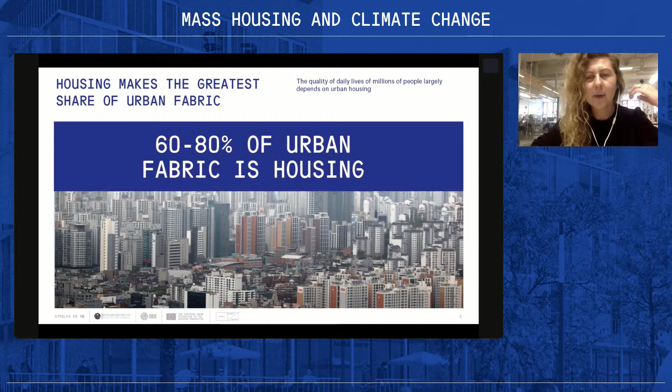Why addressing housing? Housing makes the greatest share of urban fabric all over the world, and it can take up to 80% of urban fabric. The quality of daily life, which is the most important thing why cities exist for, is highly dependent on the quality of housing.

And the great share of this housing in world cities at the moment is post-war mass housing. In Russia, we experience it to the greatest degree, I would say, because almost 74 million square meters of housing and 38 million apartments are built after the Second World War, and it's really mass-produced industrial housing. Almost 70% of the population in our country live in similar conditions, and this we can see around many other countries. For example, in France, there are almost 6 million apartments of the same typology.

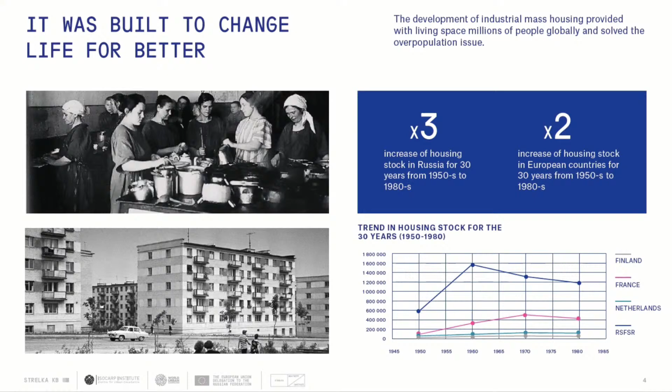In the beginning, it was built to change life for better, at least what we can see in the history of our families, I would say, in Russia. And only in 30 years in Russia, the housing stock tripled from the 50s to the 80s, and in many other countries it has doubled. So this is really the typology that shapes residential areas in many cities of the world.

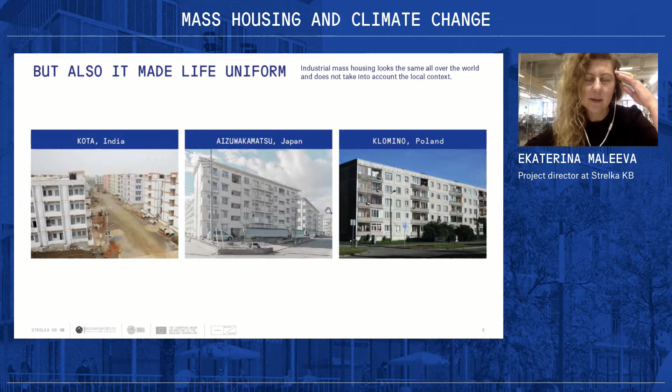But having solved this housing crisis, it also made life uniform, because you can see similar typologies all over the world. For example, from India to Japan and to Poland, you can find absolutely similar landscapes.

And we are thinking of how to reshape or adjust this kind of housing to modern conditions, or maybe diversify it to modern life. We understand that we cannot just replace it. This is totally impossible because the amount of this housing is too huge.

For example, it's going to take 30% of Russian annual GDP to just replace one-third of mass housing units. Or we are going to produce too much construction waste if we would like to demolish it and rebuild. For example, the program launched in Moscow to demolish 5-story high buildings and replace them with modern housing produces as much waste as all households in the country per year.

So it's almost the households of the country with a population of 140 million. And also, when we think of replacement of this kind of housing, we understand that we are going to produce too much CO2 emissions, because construction industry, together with production of concrete, is also very polluting.

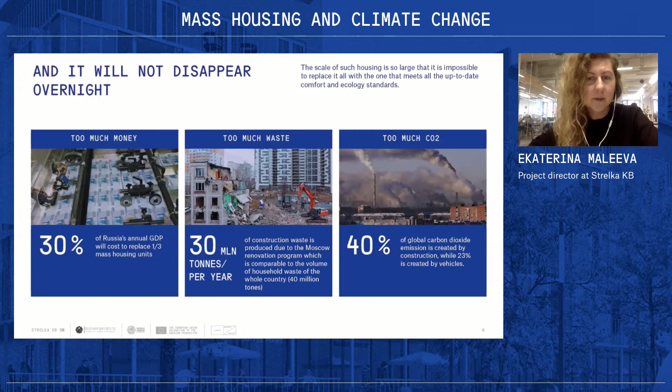We also understand that this housing can stay with us for longer than we expected, because in the beginning, when it was designed, it was planned for, let's say, a 100-year life cycle, and it hasn't expired yet. But if you renovate it, you can extend it for 40 years more. So it's not a case where we can imagine our cities becoming totally different in the next 100 years.

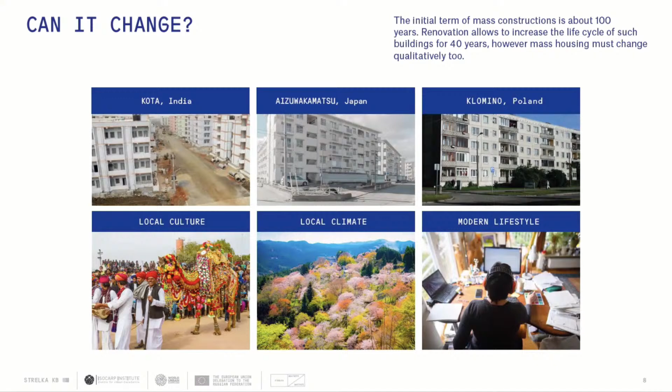So can this housing adapt and change to changing lifestyles and changing climate conditions? This was the question that we asked ourselves. Can it adjust to the local cultural context, to local climate context and future climate development, or adjust to modern trends in lifestyles?

That is why we have launched this workshop, which covers 4 different climate zones and considers different trends in climate change for those areas, and also considers similar typologies evolving according to the local context. We are happy that we have received applications and gathered participants from 10 countries, of course from Russia, but what is also interesting, from Argentina, USA, Iran, India, and Indonesia, which is a worldwide coverage.

And we are really happy to launch this event together with our partners. So I hope that this event is going to be a starting point to the broader discussion on the issue, which I think is quite important. Thank you.

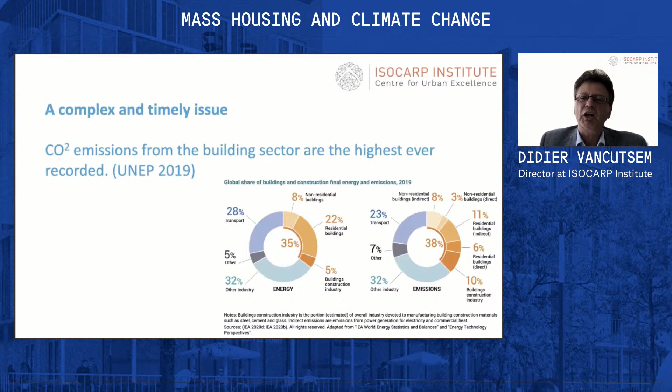Next slide. So it is crucial. And if you look at all these figures, it's really a complex issue. It's not only building, it's also a lot of different emissions produced by the building sector. If you look at the figures again here, this is the latest one from 2020, you can see that the building sector is responsible for 35% of energy consumption and also 38% of emissions and greenhouse gases, what Ekaterina was mentioning before.

And this is the situation now, but we know very well that it is growing and still continuing to grow, and we expect it to grow in the next 15, 20 years. If we see the next slide, we know that...

We are facing population growth, and we are facing a big challenge with the urban poor. With the urban poor, we have the big challenge of 880 million people living in slums to be accommodated in the next 15 years. And also with population growth, we are expecting 2.5 billion more people before or until 2050, which makes another 1 billion dwellings expected in the near future. So it's a really big challenge, and we need immediate action.

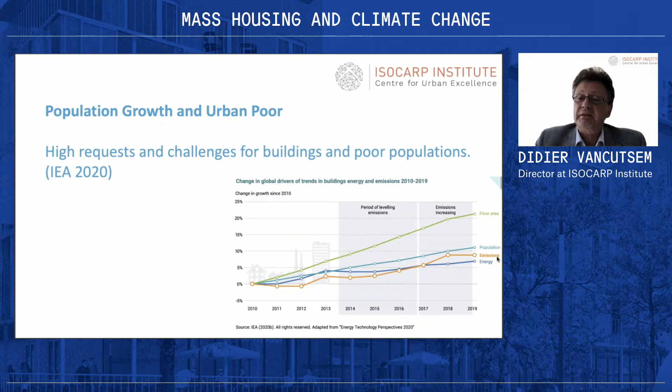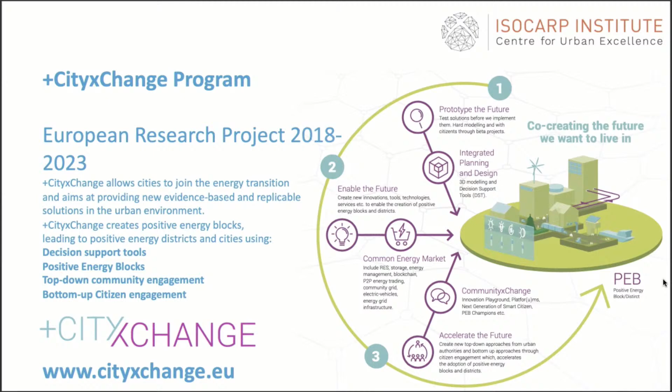And this is a kind of very interesting way of considering existing and future housing and how to make housing fit for the future, especially including all citizens. So this is an interesting initiative, but there are much more initiatives.

And of course, as the ISOCARP Institute, we are strongly supporting this initiative, because we are convinced that we need to raise global awareness on this issue. At the moment, it is not really discussed globally—it is discussed on national level, on the European level maybe, but not on the global one. This is why we would like to support and develop this integrated platform to share intelligence and knowledge, but also showcasing different initiatives and good examples and experiences.

So looking forward to the results and the discussion of today's Urban Thinker Campus. Thank you, Max. Thank you very much, Didier, for your words.

I would like now to introduce Christophe Lalande, the housing lead specialist at the Land, Housing and Shelter section of UN Habitat. We all know that UN Habitat focuses a lot on good urban planning, but the name itself, Habitat, involves a lot of talk about housing. So we are looking forward to hearing what UN Habitat has to say. Mr. Lalande, the floor is yours.

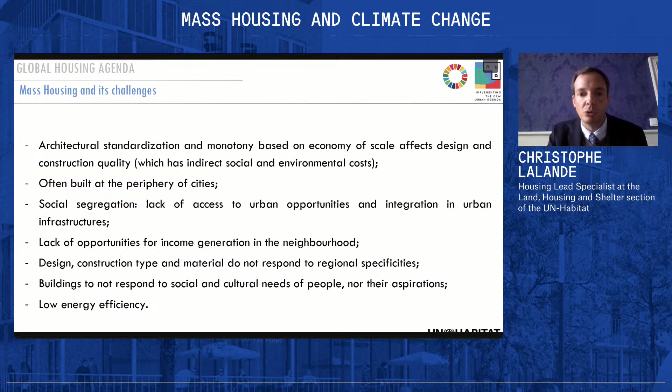We have some recommendations that we usually use when we intervene in countries on programs related to mass housing. First, when we talk about retrofitting or renovating the old housing stock, we are considering designing this into a long to short term strategy to deliver sustainable urbanization. This connects to the idea of not building housing, but building cities, using the needs and aspirations of the communities, of the people.

This is really important, especially when mass housing is used as a solution for slum upgrading. We see that in some countries. It's very important to encourage this participatory process. The new housing stock must also consider the needs of the community and the social fabric that already exists in these informal areas.

The need to connect with mobility and urban infrastructure is also really important. There is no adequate housing without access to connectivity services. We also want to promote local income opportunities, and to place public services and access to educational services as well. Next slide, please.

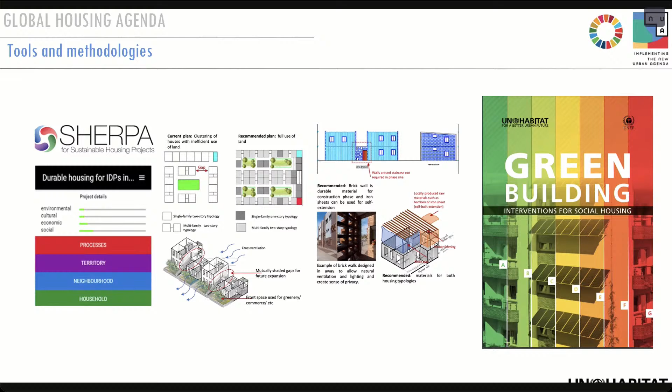We have a tool called Sherpa, which is becoming a certification tool for low-income housing. We have been piloting this assessment tool in some countries on real estate development or mass housing projects delivered by government. This is very interesting because it's allowing us and our partners to reflect about the future of the housing stock, its cultural dimension, but also the environmental sustainability of the housing stock in the future. We also have specific tools involving green building interventions that we have been using to increase energy efficiency in the old social housing stock in Eastern Europe.

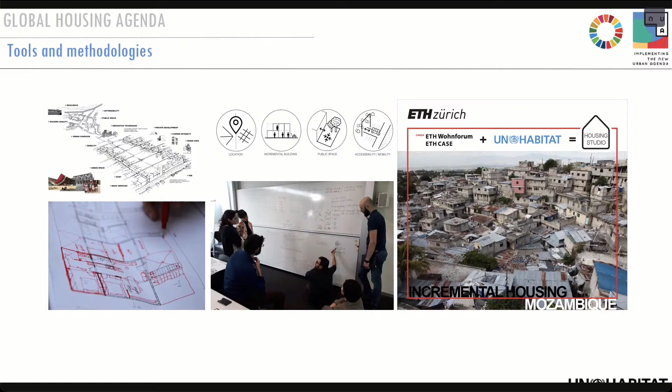Next one, please. We also have a methodology we've been using in the implementation of mass housing retrofitting or slum upgrading called the Housing Studio. Basically, this is a platform where we bring together communities, but also academia from different countries, to look at common challenges and define solutions that are really participatory, learning from the experiences of other cities and other countries.

So this is one program of UN Habitat, the Housing Studio, which is clearly a sort of hands-on approach to addressing housing needs for people and looking for solutions for retrofitting in poor urban areas.

Finally, I'd like to conclude more as an invitation, because I heard the presentation from Didier and the plan of ISOCARP to have an integrated platform to share intelligence and knowledge. I think that's very, very welcome. Next month, we will host virtually from Nairobi a series of expert group meetings to present a new housing initiative, which we are calling the Global Housing Compact. It's supported by some member states and a diversity of partners. The idea is to build a global think tank for all our partners to reflect on housing issues and look for common solutions across continents and countries.

So thank you very much for that. Final word to conclude: I'm also inviting all of you to participate in the World Urban Forum, which will take place in June in Katowice, Poland. This will be the most important event of the year for all of us interested in housing and urban issues. So we very much look forward to seeing you in Katowice. Thank you very much.

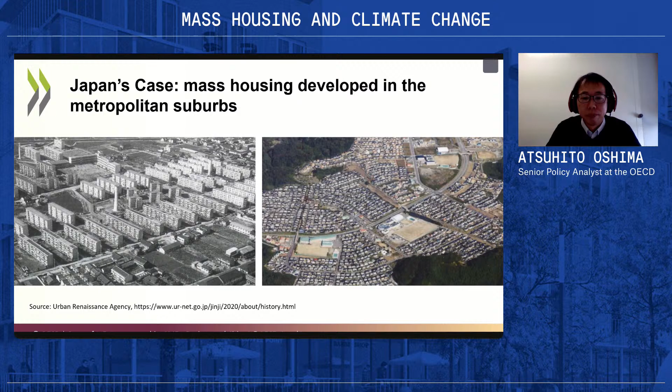Now, more than 50 years have passed. Japan is facing a completely different society and challenges. The population of Japan started to decrease in 2008, and now we have about 8 million vacant houses.

One of the most important challenges is how to address rapidly aging population. In particular, in the areas where mass housing were mainly located, residents of similar age grow older at the same time, and now they're in their 70s and 80s.

There are a variety of challenges around mass housing in Japan, but I would like to point out three of them. First, aging and depopulation - how we can adapt our mass housing and its areas to demographic change. For example, how to provide wheelchair accessible housing and daily life support for aging residents in these areas.

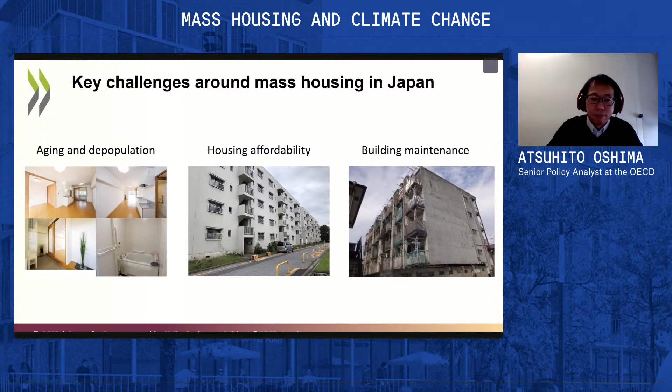Another big challenge is how to decarbonize building stock. As mentioned, buildings account for 40% of global energy-related CO2 emissions, including construction and energy use in buildings. And if you look at the energy increase, it's mainly from floor area growth globally.

If you look at both emerging economies and advanced economies, they have very different sets of conditions for building. First, emerging economies have rapid population growth, rising purchasing power, and 85% of floor area growth in emerging economies by 2050. So the focus of policies to reduce carbon emission would be on new construction.

On the other hand, in advanced economies, we have slow population growth, stable purchasing power, slow turnover rate of building stock. So clearly, we have to focus on renovation. There are very different sets of contexts according to where you live.

Now, related to mass housing, we look at the energy efficiency of buildings by age - old buildings consume energy that could be saved in new ones. For example, in the EU, based on the EU building database, buildings built before 1945 are about 2.5 times lower in energy performance of building envelope than recent buildings.

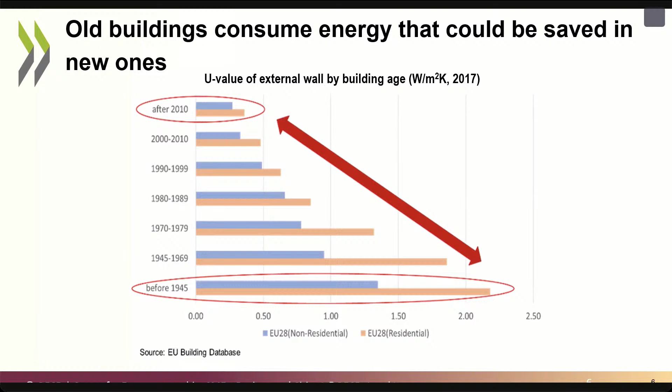More than 60% of buildings were built before 1980, when energy efficiency measures were mostly introduced. So clearly, old buildings - how to renovate or modernize this building stock - would be a challenge here.

In the policies to reduce carbon emissions, we have building energy codes, and building energy codes are mainly applied to new construction. However, if you look at new constructions compared to existing housing stock...

So clearly, renovations and how to modernize, especially mass housing stock, would be very important.

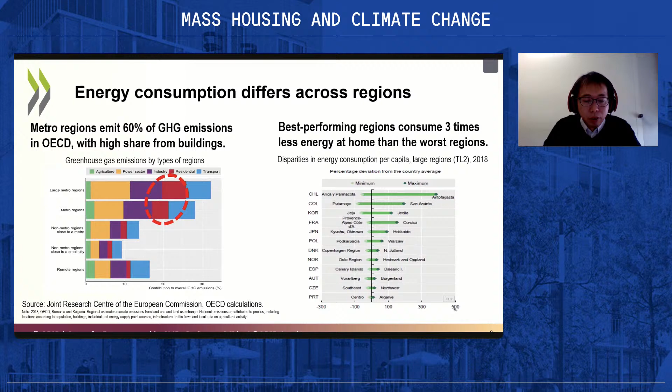What's important here is that energy consumption in buildings differ across regions. If you look at the left-hand side graph, metro regions emit 60% of global greenhouse gas emissions in OECD countries, with a high share from buildings.

If you look at the right-hand graph, best performing regions consume 3 times less energy at home than the worst regions within the country. In addition, cities, suburbs, and rural areas have very different contexts in various aspects, such as built climate, building stock composition, population and floor area growth, and poverty and affordability.

So it is very important to look at diverse place-based contexts.

So this is my last two slides. Another point is that cities and regions can play a key role in building decarbonization. First, subnational governments are very familiar with local factors like building stock and all the policy conditions. They are in a good position to implement policies and plans, with locally tailored planning.

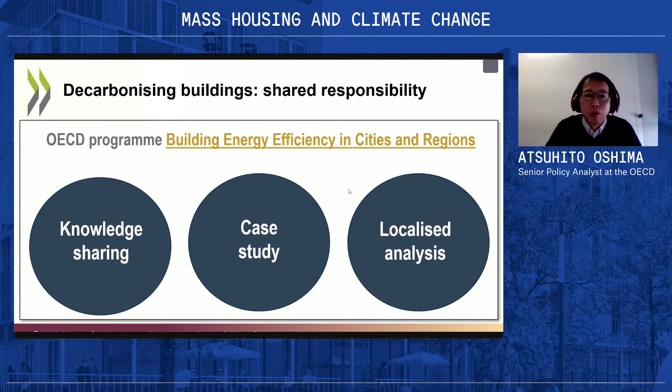My conclusion is that, considering the very different local contexts, we really have to think about regional diversity and the key role of cities and regions. Thank you very much.

Thank you very much, Mr. Oshima, for this interesting perspective from Japan, which shows, as was already shown by other previous speakers, that this problem of mass housing renovation is a worldwide problem. It was very interesting to see that it was useful, of course, to build energy efficient new housing, but since the stock of housing is so big, we definitely need first to renovate the existing stock. And the perspective on aging population was also an interesting point.

Thank you very much. I would like now to give the floor to Thomas de Béthune, who works as team leader for urban policy at the European Commission. We would be interested to know, since the European Union has no mandate on housing but has a very important indirect role through the Green Deal, notably, what instruments exist at the European level to tackle mass housing renovation. Thank you, Mike. The floor is yours.

Thank you. Indeed, I have been asked to give the EU, the European Union, and the Commission in particular, the European perspective in this field. Making housing available by renovating or building, in particular affordable housing, is a concrete way to improve citizens' well-being and achieve climate neutrality, what we all speak about already today. Yet this should be matched with adequate investments at all levels. For us in the European Union, it is at EU, but also national, regional, and city level, with whom we work on a daily basis.

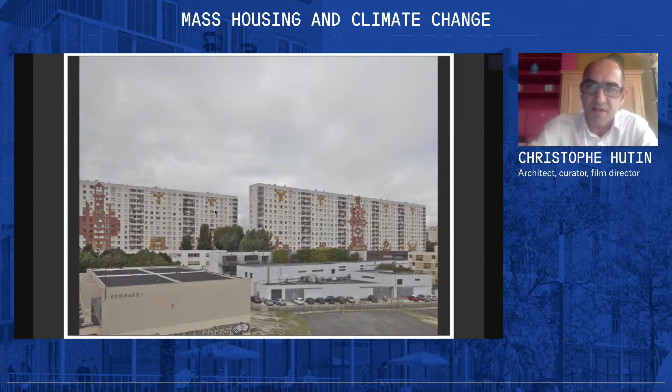So in terms of urban politics, usually you look at this situation from the outside, like in this picture. And you consider it in a very simple way. You say it's a tower, it's a building. But I propose you to go inside these blocks. And when you visit each apartment, what I did and what we did with the photographer Philippe Ruault, you discover that in fact it's 530 worlds, marvelous, completely incredible.

So when you go inside, you can see how the people are taking care of the apartment, and how the interior is very well done. And so the people, they write their own story inside these apartments. And so we decided to transform this building by taking care of that, starting from the life of the people and the story of their life. Because it's when the skill of the architecture meets the performance of the inhabitants, that the architecture can organize this meeting between a construction and the life project.

So the project was done with people inside the apartment during construction time. It's very important because the building was still occupied during the work, and we did extend the building 4 meters. It was very quick—a prefab concrete system, and you can see during the process. We transformed a lot the image of the building, also what the people consider, or the representation they've got of this building.

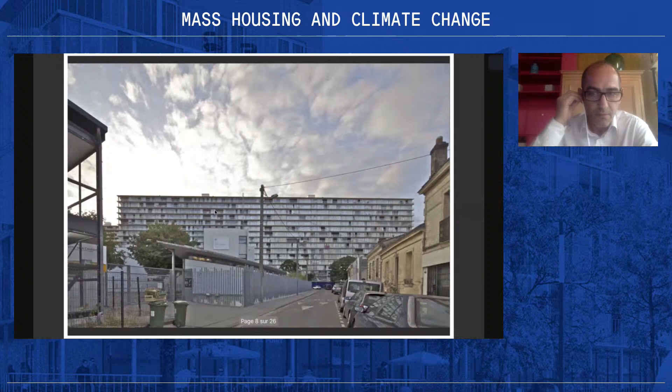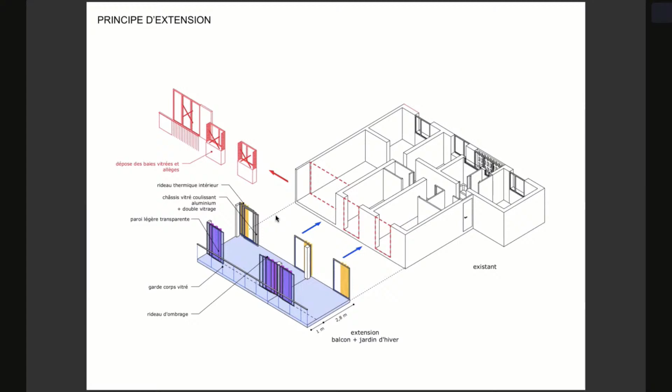And also we've got what we call a winter garden. It's 3 meters large, and after you get 1 meter of balcony, like a Belvedere, in this fantastic situation. So this extension is free space that you add for the apartment, for the living area, but it's also important in terms of energy efficiency. I can't develop it much because we don't have a lot of time, but you can use the curtain, open and close the window, use natural ventilation as you want, and the extension also protects the facade of the heated part of the apartment from the sun.

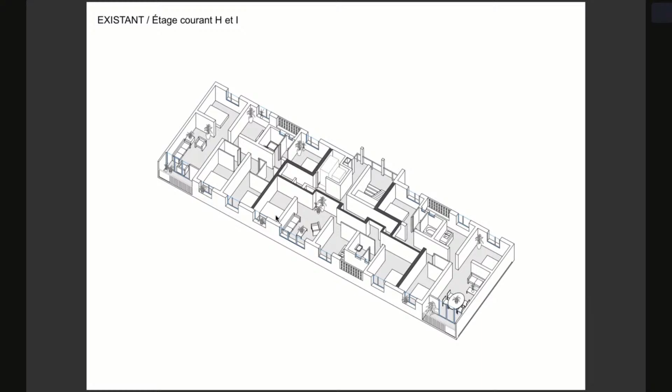So this is a floor of one level, before the construction. It's a very functionalist approach—each room has a function, and you have to use a corridor to move between rooms. So everything is a little bit narrow. You are a little bit locked inside with small windows. And after that, this is the new situation.

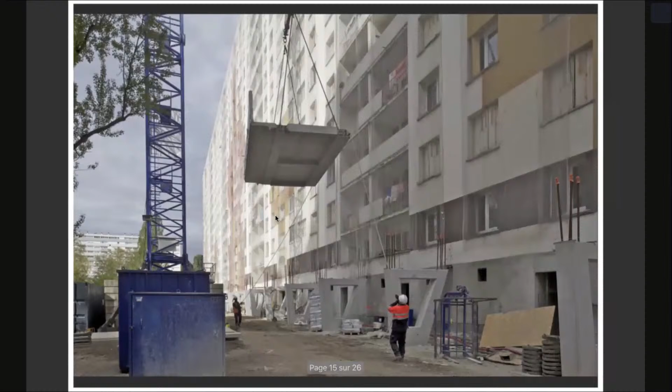And the people are watching TV and cooking behind the scene. So it was very important for us that the people living in this apartment can have the benefit of the project. They are still in the apartment after the construction, and the rental price was still the same after the project, which is also very important, because the apartments must stay affordable for them.

For example, a kitchen now is completely open, so you can move out from the kitchen. I'll show you some pictures of the result and what the people have done. And also the relation with the climate is completely new, because everything can be very open, can breathe, and you are very related, very close to the climate.

What is important also in terms of energy efficiency: in the last decade, we believed that the industrial system would be the good input for energy efficiency. I believe strongly that we have to be confident with the inhabitants, because they are the best experts of daily life, and they know how to regulate the comfort and what they want in terms of comfort. This is the key issue for me for energy efficiency. If you don't empower the people in that issue, the results are not here.

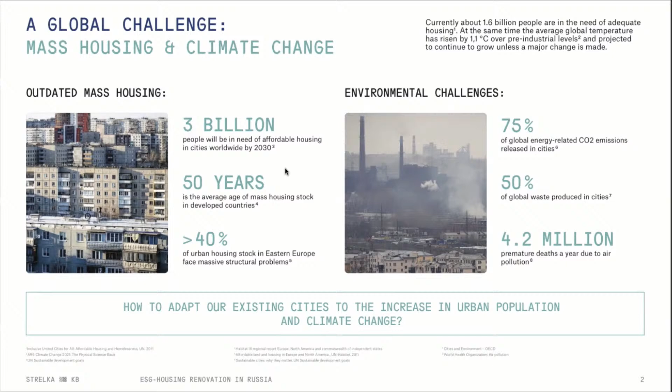But it's not only the outdated mass housing, but also the environmental challenges we're facing at the moment. First of all, more than 70% of global energy-related CO2 emissions are released in cities, and just half of global waste is produced in cities. This is directly connected to the housing issue. So the question is how to adapt our existing cities and buildings to the increase in urban population, to the developmental pressures we experience in cities, and to climate change.

Renovation as an approach to the outdated mass housing issue has some challenges and also opportunities. I really enjoyed how it was said before that in Germany, you preferred not to look at this as a problem, but rather see opportunities and potential in reworking old buildings rather than building new ones.

Talking about renovation as an approach, first of all, the carbon footprint is quite challenging because the demolition and subsequent construction of multi-story buildings really contributes hugely to the increase of CO2 emissions. In Moscow, it's a great concern because usually the demolished buildings are something like 5 stories, as in the picture, but the new buildings are built twice or 3 times higher.

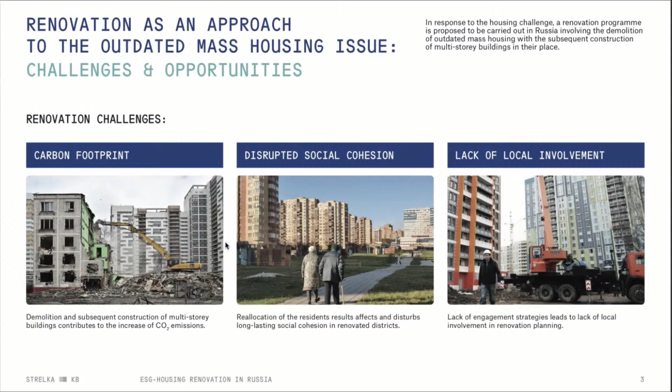The second thing, also illustrated by the example from Vienna, is keeping the residents and their social connections in place, because relocating residents during renovation can disturb long-lasting social cohesion in neighborhoods. Lack of local involvement is also something we see in our local context—a lack of engagement strategies, which leads to low involvement of people in the plans for renovation.

In response to these challenges, we can apply ESG principles—environmental, social, and governance—to overcome some of the issues mentioned. Talking about E, the efficient use of available resources: buildings, as Ekaterina said in her presentation, 60 to 80% of buildings in cities are residential, and they are already built. So efficient use of these housing units, as well as ensuring minimal environmental impact during renovation and during their further operation, is something the E can bring to this process.

Then S, social: comfortable living and working, but also being able to build these connections in places, and also to keep the social connections, not only between neighbors, but also between residents and, for example, people who would sell you some of the vegetables on a daily basis.

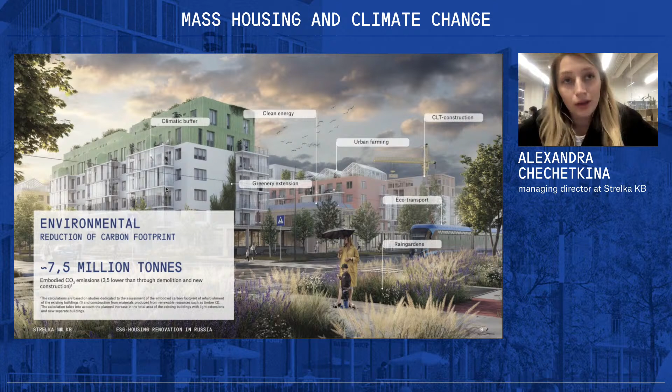So even this set of solutions can lead to a reduction of the carbon footprint, 7.5 million tons, 3.5 times less than demolition and new construction, if this was to be used as a method instead.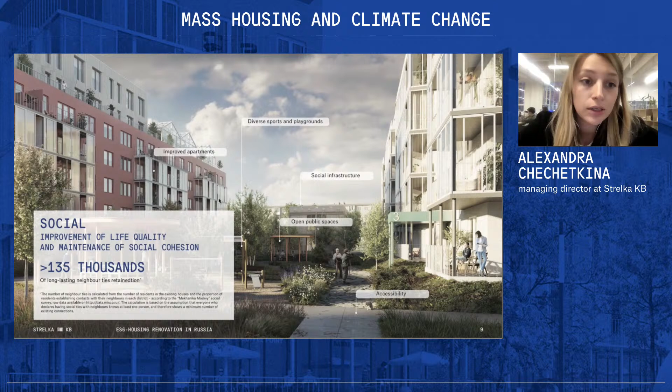In terms of the social example, improvement of life quality and maintenance of social cohesion would lead to saving more than 135,000 long-lasting neighbor ties, through improved apartments which engage neighbors to communicate with each other, diverse sports and playgrounds which ensure inclusivity, social infrastructure which actually exists now in these neighborhoods in Moscow and other cities of Russia, and well-done open public spaces which ensure collective experience and communication, and of course accessibility, so that these places are accessible to all different kinds of people.

And in terms of governance, if we develop new floors above existing buildings, the new income generated by these apartments may not only go to the developers or other stakeholders, but may also go to the local residents, who may use this money to improve the local area where they live, for example their courtyard. New land surveying and mixed financial programs, and in general local involvement in the renovation process and the resulting benefits, can lead to up to 60% of residents in these districts being renovated, participating in the development of their neighborhood.

This is not a very extended or widespread case at the moment. On the contrary, not more than 10%, but actually, according to publicly published information, not more than 4% of people currently living in housing under the renovation program in Moscow are physically participating in the process of planning this renovation. This is an aspect to be addressed for all the other buildings and neighborhoods we have in the cities and in the country in general.

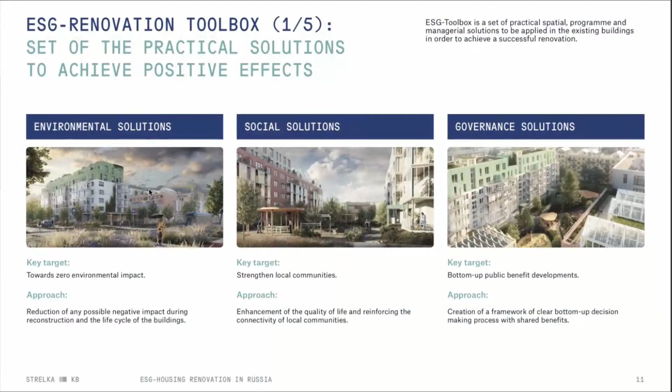And for governance solutions, bottom-up public benefit developments and projects that would allow the actual users of this territory to have impact on how to develop this place for their day-to-day living, by creating a framework of clear bottom-up decision-making with shared benefits. Here are some of the examples we developed, and we hope this will help the Moscow government and governments of other cities in Russia to start and develop these processes of renovation without demolition.

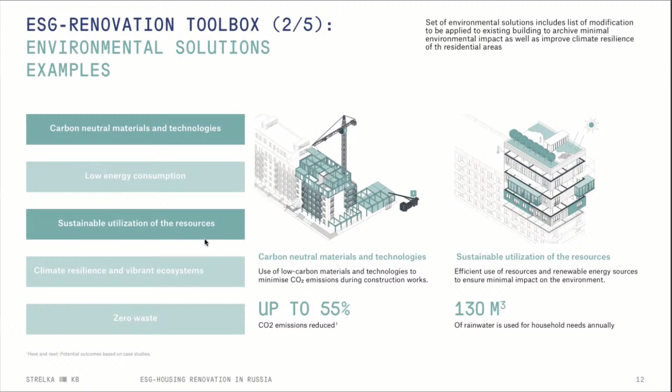So, for example, environmental solutions with carbon neutral materials and technologies, sustainable utilization of resources, efficient use of resources and renewable energy sources to ensure minimal impact on the environment, and zero waste and climate resilience in vibrant ecosystems. All of this is actually possible to apply already now.

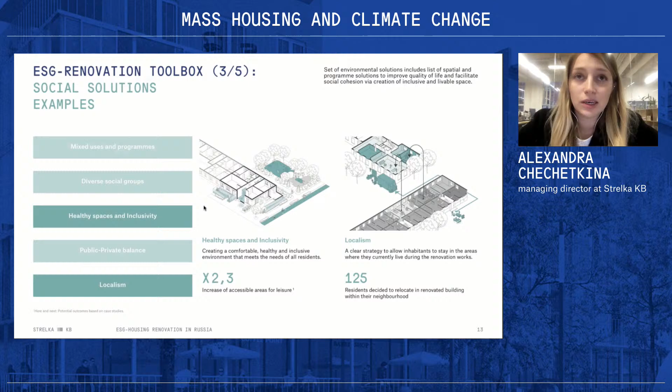In terms of social solutions, to develop mixed-use programs that would enhance social communication between residents and guests of these places, diverse social groups, healthy spaces, and inclusivity of these spaces, and some private-public balance, which now, after all these buildings coming from the Soviet era, is still in search, so to say.

Here is an example of a typical neighborhood coming from the Soviet time with 5-story buildings, which is more than half of the Russian housing stock. We can see how green roofs and facades, using local plants in the landscaping, passive temperature regulation with new balconies as we just saw in the previous project, divided waste collection and rooftop renewable energy resources, and also some architectural solutions which change the whole view of these buildings.

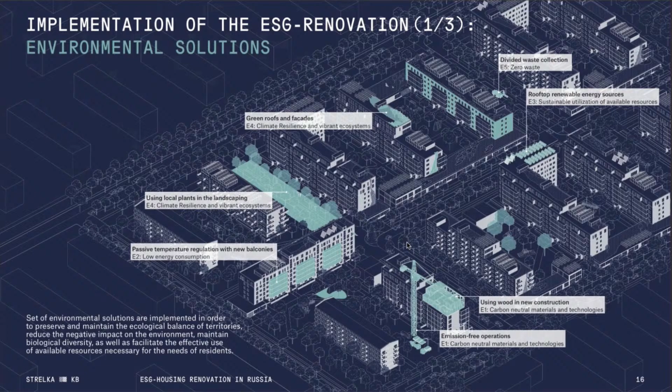This set of environmental solutions is implemented to preserve and maintain the ecological balance of these territories, to reduce the negative impact on the environment and maintain the biological diversity that is there in these areas, because there is a lot of greenery and people really love to live in these neighborhoods due to the balance of greenery they still can have in cities.

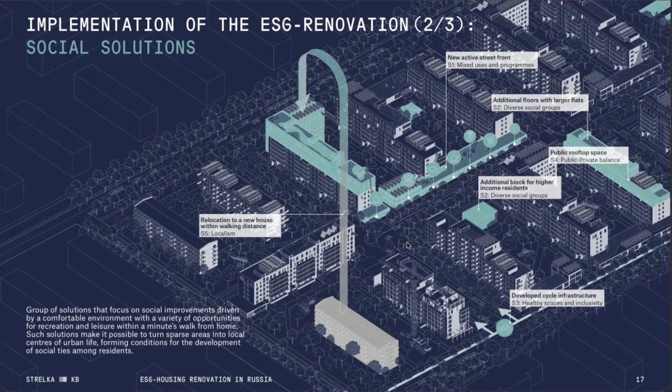Some examples of social solutions: this group includes relocation to a new house within walking distance, giving current residents the opportunity to stay in place and not be forced to move to another neighborhood because of the renovation process, or adding additional blocks for higher income residents, which can also provide some social mix and bring new money into the territory, which will be kept there.

Also developing new cycle infrastructure and public rooftop space, which are not very much used at the moment. So this group of solutions can focus on social improvements driven by a comfortable, safe environment, with a variety of opportunities for recreation and leisure within a 5-minute walk from home.

So these solutions can really turn sparse areas into local centers of urban life, forming conditions for the development of social ties among residents.

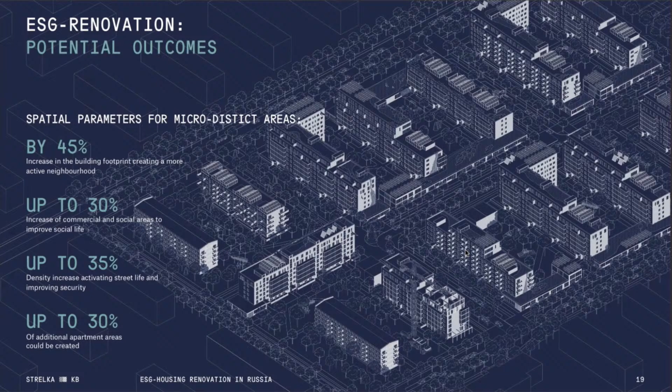So potential outcomes: on one hand, up to 45% increase in building footprint, creating a more active neighborhood with more intensity of use; diversification with up to 30% increase of commercial and social areas to improve social life and infrastructure within walking distance; up to 35% density increase, activating street life and improving security; and up to 30% additional apartment areas could be created. But all of this comes with buildings saved, not demolished, but reconstructed.

Thank you very much for the attention, and it's great to have the opportunity to discuss these topics with such a great panel of speakers. Thank you.

Thank you very much, Alexandra, for your presentation. I think we've reached a consensus on the fact that there should be no demolition of mass housing units, because we've seen throughout the presentations all the instruments that exist to renovate them and make them energy efficient. We saw with your presentation, as well as with Christophe Hutin's presentation, that it was possible and feasible to redesign the existing units and make them more viable for their residents.

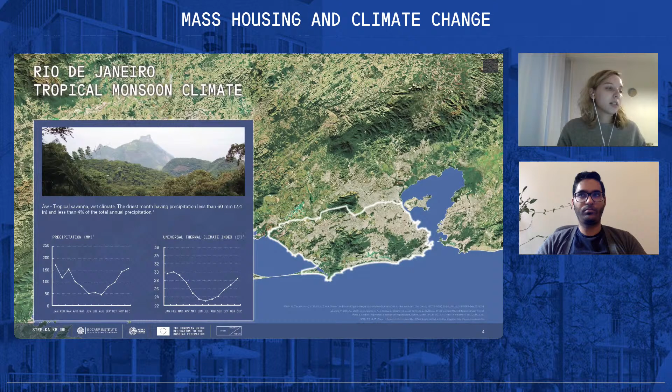Annual precipitation is often abundant in tropical climates. There are normally only 2 seasons, a wet season and a dry season. The annual temperature range is normally very small, and sunlight is intense. In the future we will face various natural disasters such as floods, landslides, heat waves, heat islands, and so on. So we need to be ready for these climate changes when thinking about future mass housing blocks, and also keep in mind emissions - today nearly 40% of global carbon emissions come from construction.

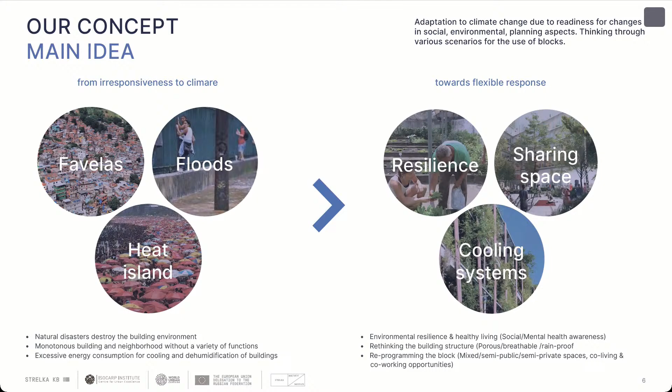Today Rio de Janeiro faces natural disasters. A lot of people live in houses unsuitable for life - favelas. The city is covered by a heat island, and as a result the temperature rises 1 to 4 degrees above normal in heating zones. There is also a constant risk of flooding of buildings. Adaptation to climate change requires readiness for changes in social and environmental planning aspects. We need to think about future society, healthy living, construction options, and different scenarios for life.

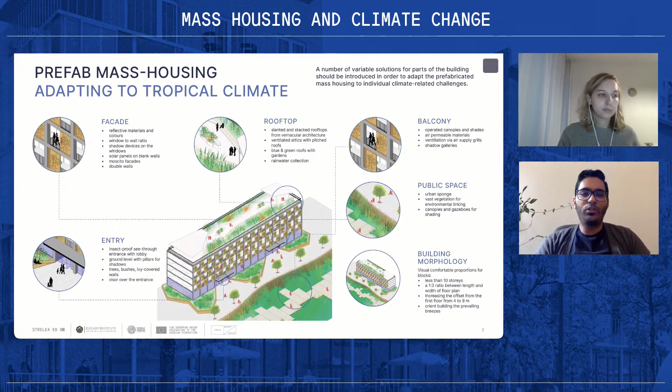Keeping in mind the unique conditions of the context and its effect on the mass housing block, we suggest interventions to increase long-term resilience and decrease the environmental stress it is likely to face until 2100. Our main areas of focus are facade, rooftop, balcony, entry area, public space, and the building morphology itself. Our solutions concentrate on nature-based solutions, for example natural air cooling, more green zones, and creating a bioswale to collect extra rainwater runoff and mitigate flooding risk. Our interventions seek to transform the block from a rigid, foreign, imposing structure into a porous, adaptable, and resilient one. The building morphology is designed to make the housing blocks more visually comfortable and not impose upon their context.

While we designed the double rooftop structure to protect from the sun, we also saw the potential of shared spaces sheltered from the rain. Roofs are often underused, but by providing covered areas, we aim to create a common space for the residents while reducing thermal heat gain. The green and blue infrastructure on the roof has the potential to collect rainwater for recycling and growing food.

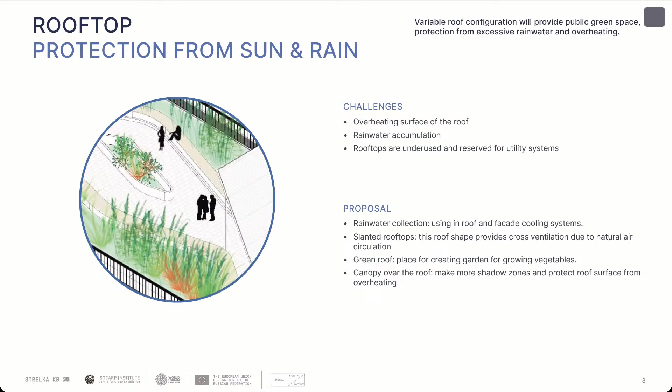For the facade, we have to promote ventilation because it's a humid climate, while also providing protection against mosquitoes and excessive sunlight. We propose a horizontal louver system designed for the sun path per building. This allows air to freely pass through, while the integrated net will not allow mosquitoes to go through. The use of reflective materials and colors will also assist in reducing the heat gain.

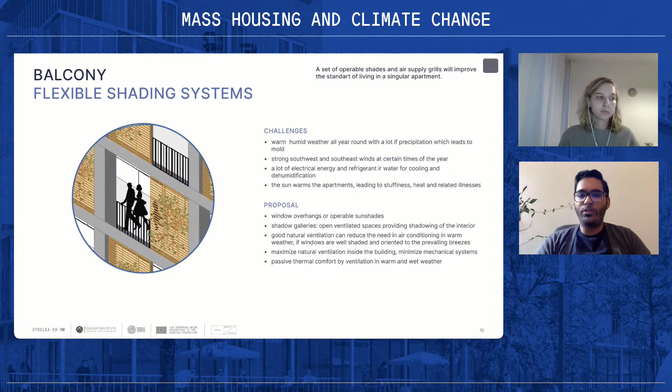The idea with the balconies is to reduce the cross-section of the building, which helps in increasing the natural ventilation. So we propose circulation corridors on the sides of the blocks instead of in the center. Another option could be to have voids or punctures in the building facade. Both these options assist in natural ventilation.

Another important part of the building which should undergo a complete redesign is the building's entrance. According to our projections, parts of Rio de Janeiro have a high probability of being flooded due to climate change. Therefore, we believe that the building's morphology should reflect the natural challenges and adapt to them. Raising the first floor with pillars will prevent the lower apartments from being consumed by water in case of flood, and simultaneously provide a useful shared space, sheltered from the elements during normal times.

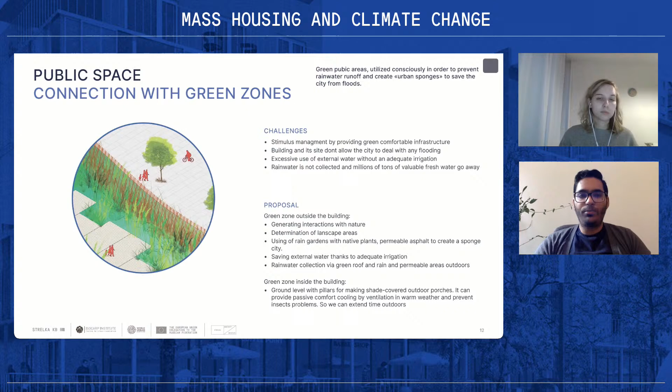Underused public areas are a common problem in post-war mass housing. An environmentally conscious approach would be to utilize this emptiness in urban fabric and create public green spaces, serving as environmental linkages. Another vital detail to add to the neighborhood's public spaces is our flood defense systems, so-called urban sponges, which will be strategically placed around the building away from circulation and occupied zones.

In this scale, we recommend to focus on visually comfortable proportions: building blocks less than 10 stories, safe distance between blocks in the range of 25-90 meters, optimal distance to see the face of people or just a body, orient block on sunshine and prevailing breezes, making more shadow zones with gazebos and trees, and using reflective materials for sidewalks and facades.

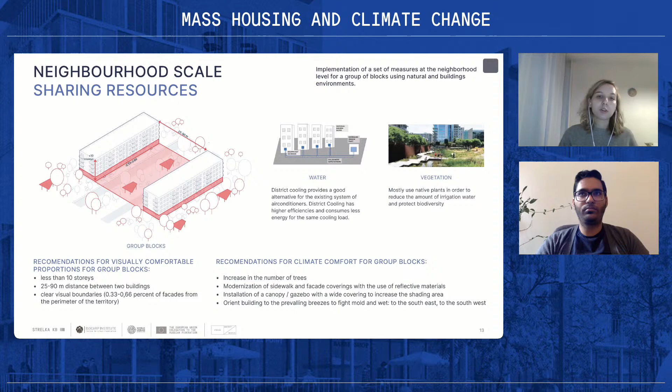Also, developing a central cooling system for the district helps to save energy for local cooling, and using native plants for rain gardens where we can collect rainwater.

Our solutions influence the ecology, society, and economy spheres and have different impacts for householders and renters, developers, and government. Our solution helps to improve the mental health of residents, save energy resources, and develop a green economy. The multi-solution focuses on social cohesion, indoor and outdoor space of blocks, functional diversity, improvements in cooling systems, and energy balance. It is our connective conceptual vision about the future block in the tropical city zone.

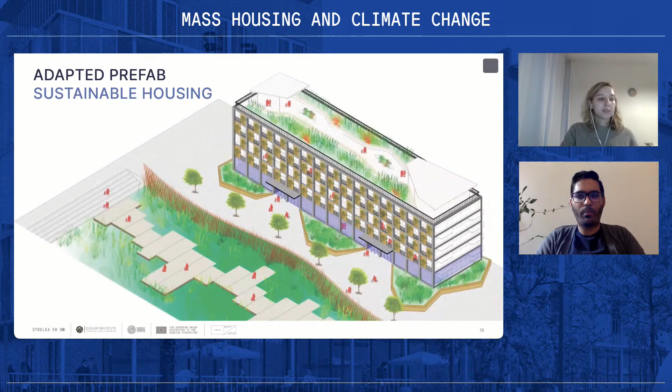Thanks for your attention.

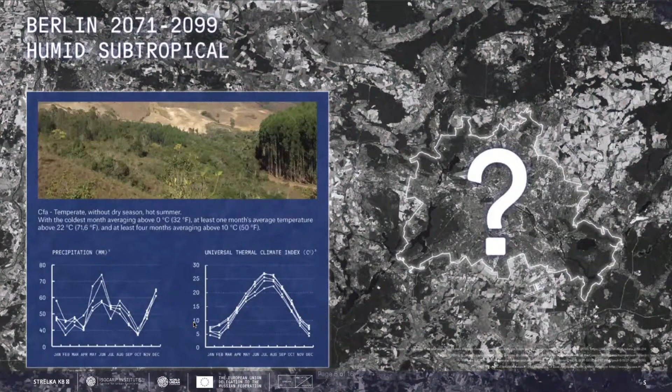The Berlin climate is characterized by warm summer and humid continental climate, while it is predicted that by 2071 it will be a humid subtropical climate.

Our task was to rethink the threats and opportunities that mass housing is expected to face. While studying these and brainstorming on the climatic situation and the planning for mass housing, we proposed general design principles and policy implementation to try to answer the climate changes.

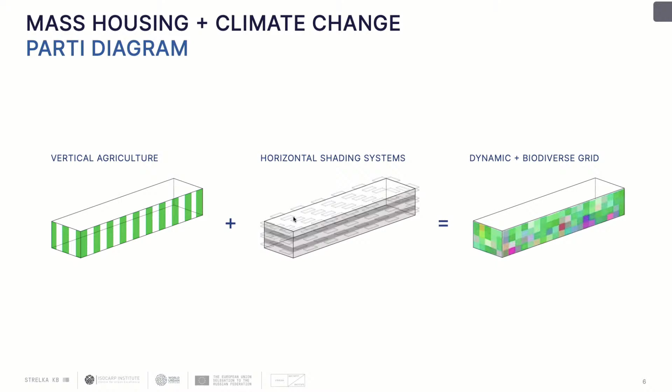Basically, our proposal is that the facade of the building will be offered a dynamic and biodiverse grid that will adapt a lot of plantation, which we'll explain later in the overview of the architectonic elements. We focused on these elements in the facade, rooftop, balcony, and public space, each one.

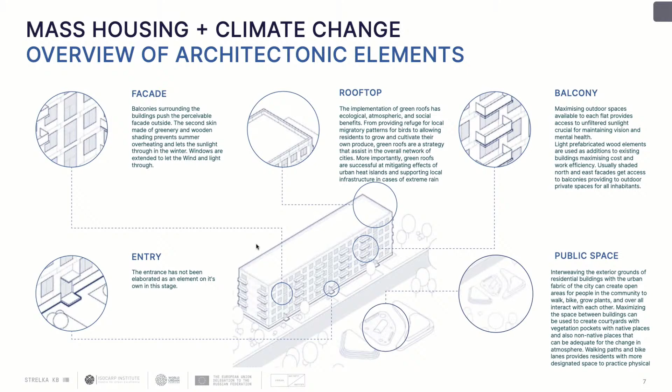While going over this with the team, we focused on the rooftop, shown here schematically. The challenge is that the city of Berlin is categorized, like many other cities, with urban heat island effect.

Our solution is the implementation of green roofs, which have ecological, atmospheric, and social benefits, from providing a refuge for local migratory patterns for birds to allowing residents to grow and cultivate their own produce. Green roofs are also a strategy that assists in the overall network of cities.

Our second element is the facade. The balconies surrounding the buildings push the perceivable facade outside.

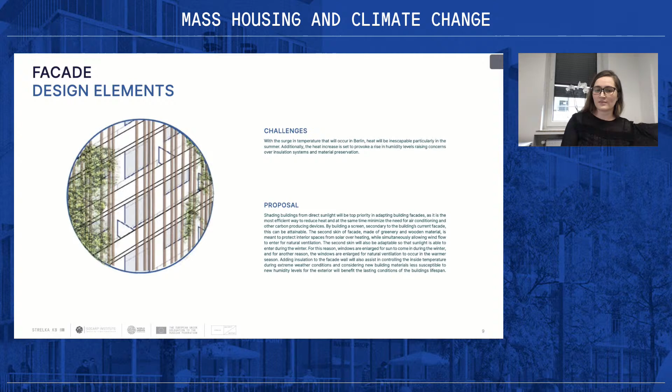The second skin is made out of greenery and wooden shading, which prevent summer overheating and let sunlight through in the winter. Windows are extended to let the wind and light through.

Balconies maximize the outdoor spaces in our design, available to each flat, and also provide access to unfiltered sunlight. The idea of balconies on its own is that the layout of the building itself will be flexible housing.

The balconies can be extended and can be turned into more private or public space.

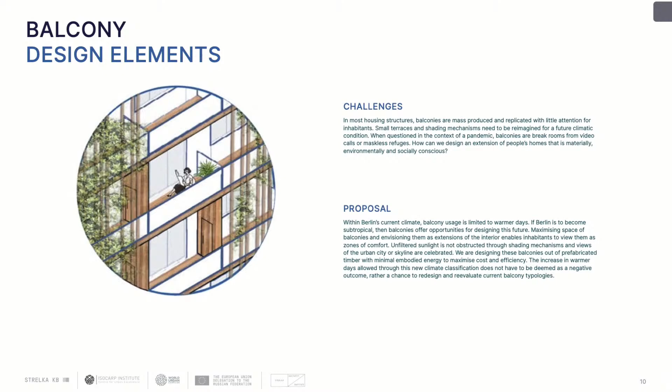The last but not least is the public space, which is an interweaving of the exterior grounds of the residential buildings with the urban fabric of the city, creating areas for people in the community to interact with each other.

The maximization of this space between the buildings can be used to create courtyards with vegetation pockets, with native plants and also non-native plants that can be adapted and adequate for the climatic changes. Walking paths and bike lanes provide residents with more designated space to practice physical activities.

Here is an overview of our combined principles. In this diagram we focused on three elements, or three pillars: infrastructure, policy reform, and design solution, representing also the scale of intervention. The design solutions should also cover interaction with these.

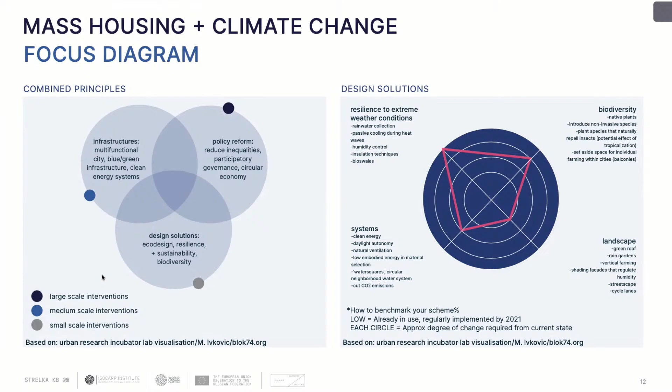Exploring this workshop, these solutions give an overview in terms of design. The proposed design guidelines, related to architectural transformation, are that we must offer housing for all.

We should also reduce inequalities on the basis of race and gender identity, and advocate for inclusivity for residents.

We should offer access to social transit, green infrastructure, and increase walkability. The idea is to design the 15-minute city.

As architects and urban planners, we should be able to offer an adaptable architecture - to design a plan that bridges current climate change challenges with a projected future state. We should also take into consideration that the buildings we design today should be resilient in extreme conditions.

The solution can also be found in local source materials - for example, wood can be sourced here in the area of Brandenburg. The building and urban entities should be resilient in these conditions.

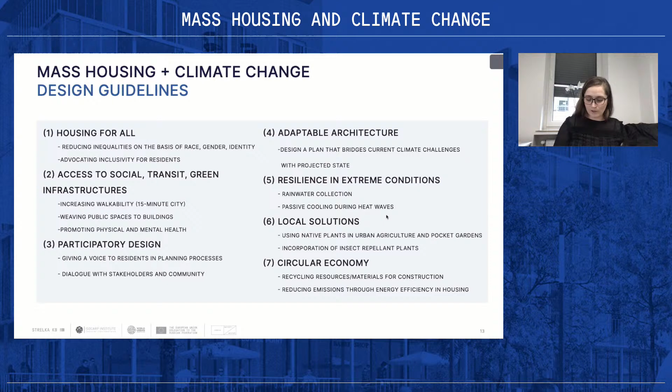We should also incorporate repellent plants, shown here as projected ecologies. This is just a basic overview of how we see the implementation of fauna in the built environment and in the building itself.

Let's see how we can design and redesign for the hot and arid climates and for the city of Samarkand. Can the representative of that group share their screen? Yeah, one moment. Yes.

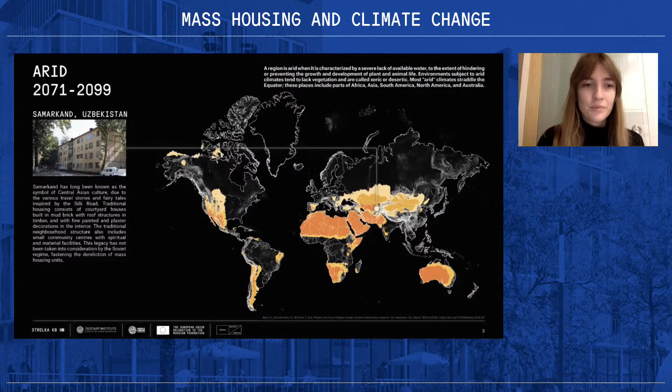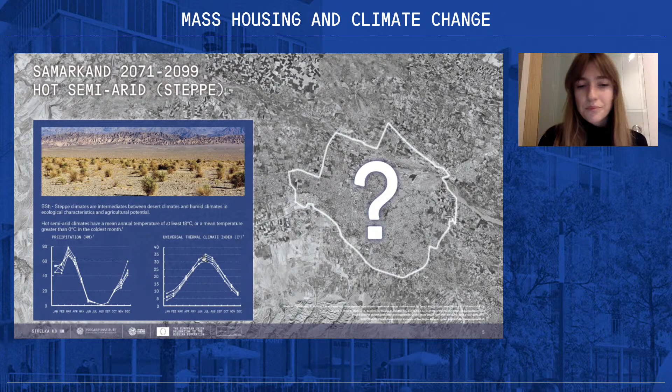So water becomes the most valuable source in this area. That is why our concept is based on three main aspects. The first is local aspects that were missed during mass housing in Soviet time. We based our concept on the mahalla idea, local neighborhoods with a feature that they use the space between houses as common areas, so we wanted to introduce it into our concept. The second thing is natural cooling.

We use all possibilities to cool the air inside the building. The first, and most important part, is water harvesting, so we use all possible solutions for this. The solution is, in general, a water harvesting double facade with a common space created between the two facades.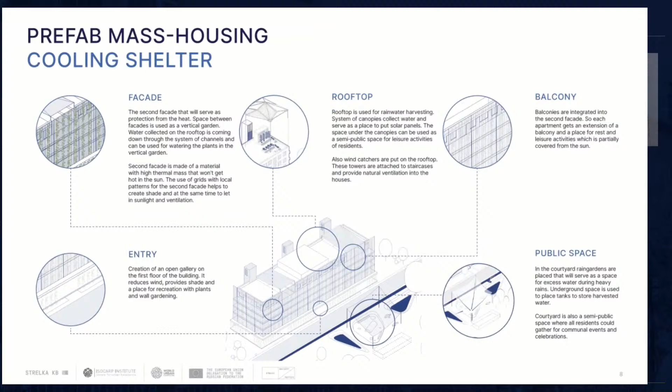The second part is the rooftop. We place canopies which also collect water from the rain, and we organize public spaces which serve as a public garden for the locals. We also put wind towers, which were used in ancient times to catch the cool wind and use it for cooling the space inside the building.

We suggest integrating balconies into the double facade, and for the entries we propose an open gallery, which is also a very local thing, with canopies and grapes on it. This is a very local feature for Samarkand.

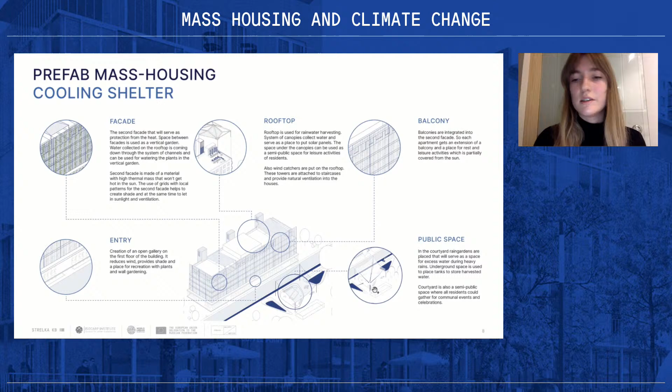For public space, we've seen that during the flood period there is a real problem of flooding. For this period, we want to use public spaces as a sponge to absorb and retain water during the flood. We also create canopies to collect clean water and save it in tanks underground.

Here we can see closer the solutions with wind towers, canopies, and gardens on the roof. This is part of the facade, which contains the screen with plants that collects water. We also propose to cut out patios from the existing volume to create spaces for social gathering for the neighbors, which is also part of local culture.

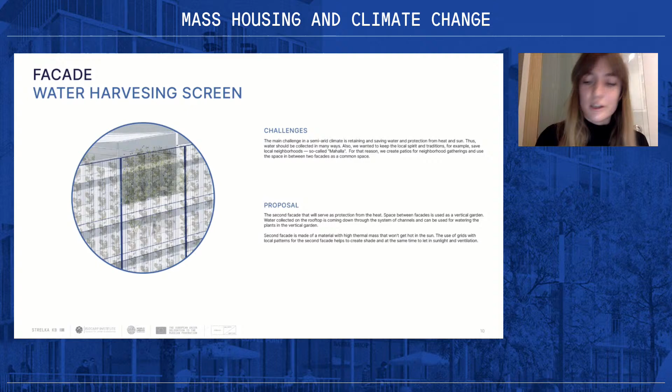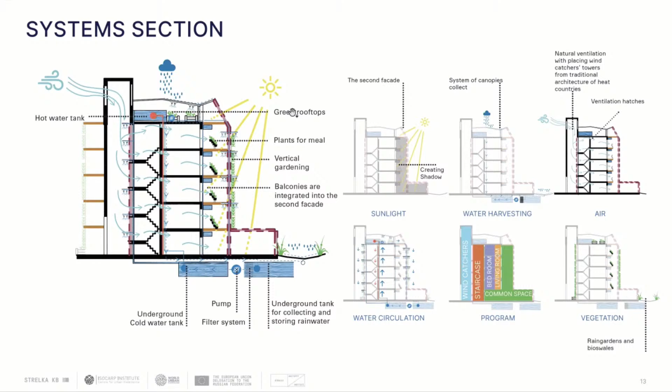This is basically the systems integrated into our design. You see the wind tower, which catches the airflow and could be cooled by sprinklers with water, then it goes inside the building. The second part is the water harvesting system, and the third part is the screen which protects our building from the sun heat. So as you see, our main focus is social function.

We want to increase social gathering and local traditions in our design, and this is basically how it would look like. Thank you.

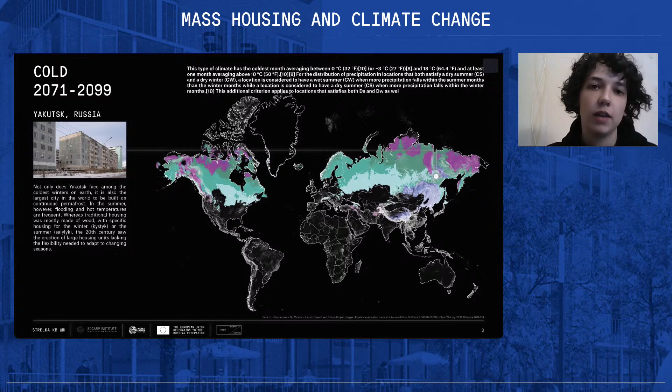Okay, I would like to present our idea for Yakutsk climate. Right now we have a very bad climate condition because it's really cold during all the year, and it became a bit hotter because of climate change, but it will bring us not just good consequences, not just benefits from it. As we can see, temperature will become higher.

We will have a bit more sunny days, but as well, we have permafrost there, and actually all the buildings have a special design because all of them stand on pillars. When permafrost is melting, what we currently have in Yakutsk, buildings are destroyed, and it's the main problem we should address. Water overflow works against this as well, but we have some good benefits from climate change, we'll have more sunny days.

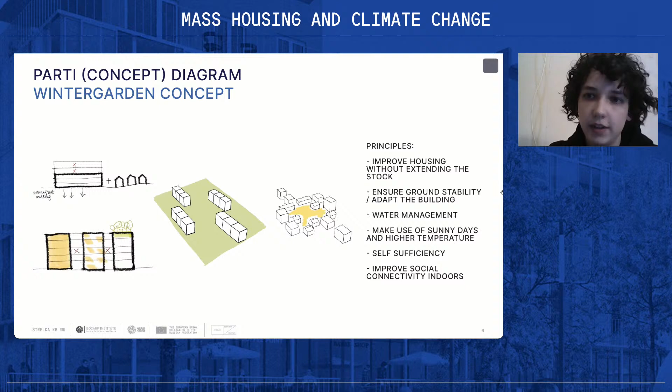Our main idea is to redistribute the density of the building, and by this improve housing without demolishing them. We would like to reduce the load, reduce the load, and collect the water, which will also work better for the permafrost. So our whole concept is difficult to divide, but we can separate it into 5 stages.

For example, the balcony that we make bigger and more functional becomes a big part of managing the facade, which we will insulate, and the entry that we will make more adapted for the new requirements of this climate will become part of the whole public space that we will have around our courtyard.

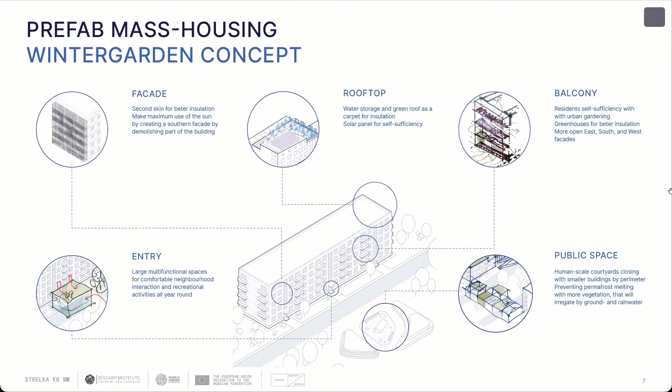The rooftop, we wanted it not as a public space, but as a technical level of our building because of this very bad climate condition, and we propose to put solar panels there because, as I told you, Yakutsk has a lot of sunny hours, and we could use that. We will collect water and use it later in our greenhouses, and it will also help us prevent permafrost melting because water works as a blanket there and heats the ground.

The next one deals with the facade, and we will work differently with different facades because on the north facade we need to insulate them, since the insulation layers and materials are really in bad condition right now, and we would like to make a southern facade. That's why we will demolish part of the building, so all the people can have a southern facade and use that opportunity.

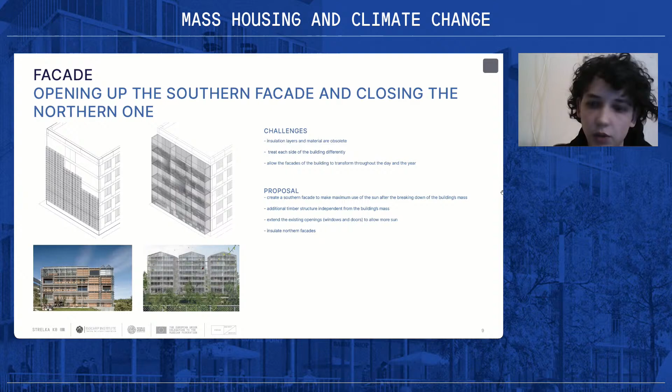That's why we will develop this winter garden, and it will both work to adapt the flats to the new requirements of residents, make them bigger, and make them more self-sufficient through urban gardening, urban farming.

We will make a new entry, and we have two approaches, one of them when we destroy part of the building. We will put there one big new space for interaction for the residents, where they can do a lot of different activities which can change through the years, through the decades.

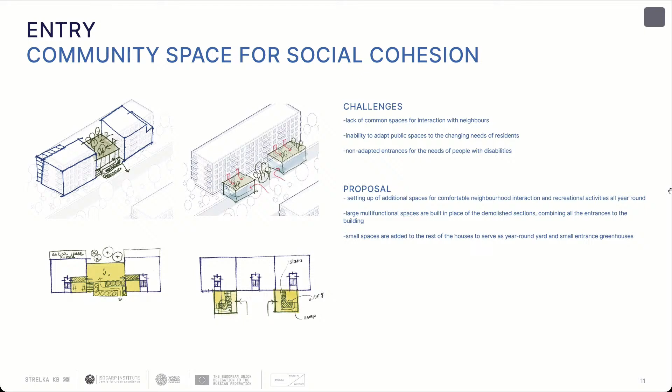Where we are not demolishing anything, we will just add a new entry adapted for people with disabilities, because actually these pillars are really high, around 1.5 meters, and people with disabilities just can't get to the entry.

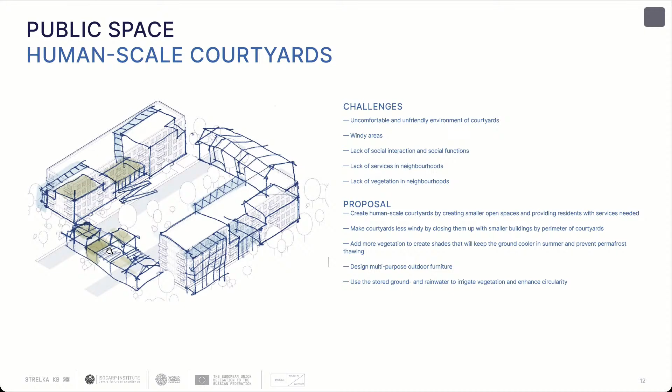It will become part of a system of public space that will be built around the old houses, built using panels from the same houses, and it will make the courtyard more human scale. We will make this system more flexible, more adaptive to changes.

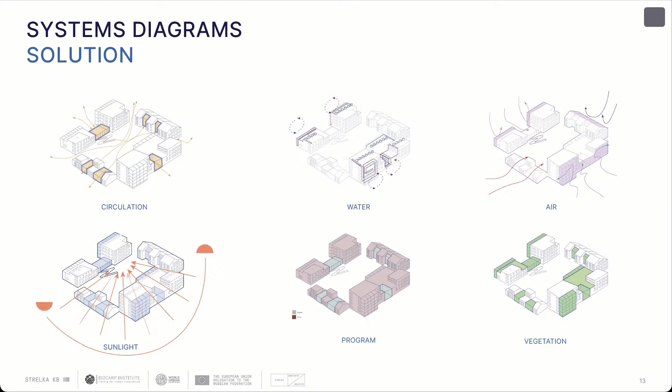And this is a summary of all our solutions. As you can see, we will improve circulation. We will collect and reuse the water. We will reduce the wind that we have here, because we will close the courtyard. We will have more sunlight in our courtyard, because we will lower the height of the building. And finally, we will have public space, common space that will work all year round in this climate. What's very important, we will have vegetation with access all year round as well.

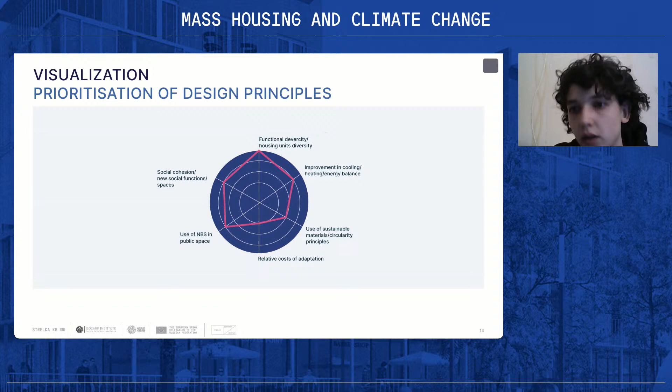We concentrate mainly on improving the balance of the house, because of the permafrost melting, and it's increasing social function and functional diversity. But it was difficult to make a relative cost estimate of this adaptation, because we will have new materials, and it's really difficult to bring them to your area, so sustainability isn't fully solved. This building is also under threat of total destruction, which is why the volume of intervention is high, and that's why the cost will be high as well.

We don't have much time for remarks, but I think it's quite beneficial to hear some feedback about these very well thought-through designs we've seen in all four groups. I was wondering, Michaela, Mrs. Kauer, if you'd be interested in giving some comments from your side.

Yeah, thanks a lot. I think these are remarkable projects, and congrats to all of you who have done that. It's really great, and I especially like the approach of doing this along the climate zones. I was always thinking in my mind, have I ever been in such places? And I just found two. I've been to Irkutsk once, and clearly I've been to places in Europe, but Brazil is still on my list to go. So yeah, you inspired me.